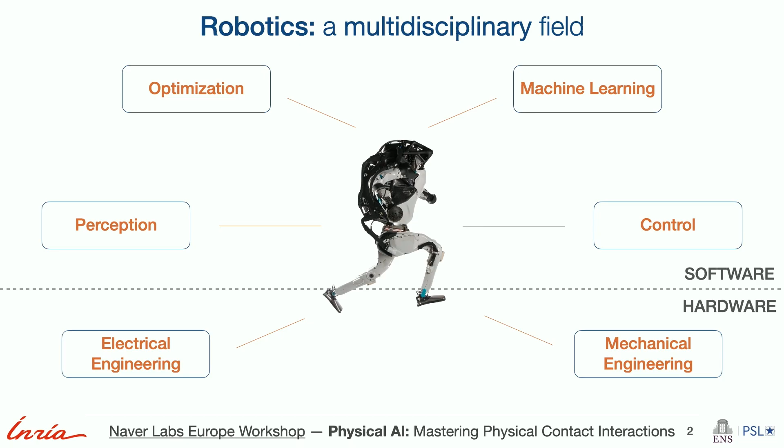You all know, but robotics is a very multidisciplinary field with hardware. I will just talk briefly about hardware, which we never mentioned in this workshop, but I think this is the most important track that we need to focus on now, aligned with the software perspective. For software, we can see perception, optimization, machine learning, and control. And now with foundation models, we are trying to glue everything together. But there is still a gap between software and hardware, and we should move forward.

I would like to cover a bit, from my perspective, where we stand in robotics today. As we mentioned, robots are first and foremost physical systems, so we should first focus on good hardware to make good motion. I think all the people at the cutting edge of research in robotics, like Toyota Research Institute or Boston Dynamics, are there first because they have very good hardware that they master and on which they can rely.

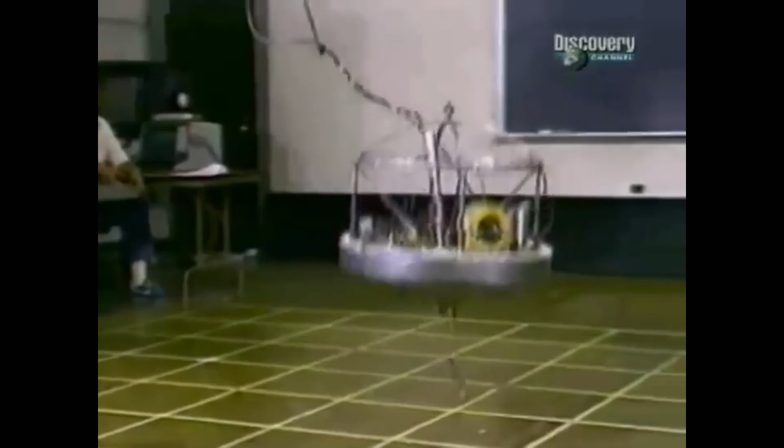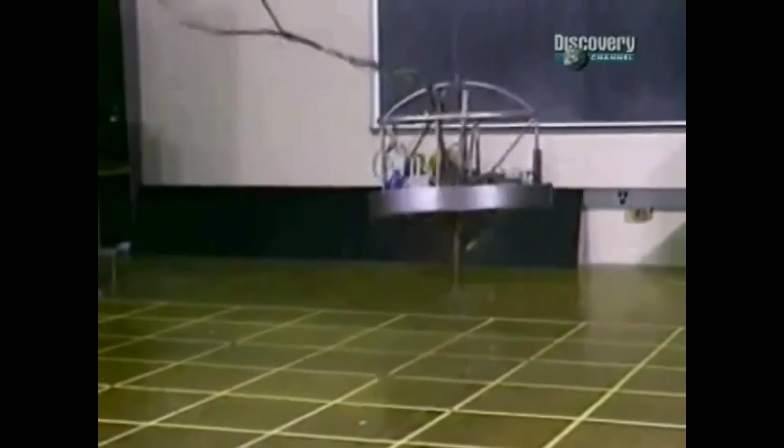Just a short story. This is a story I think most of you already know, but I don't know if you know what is behind this robot. Maybe. Yes, Mark Raibert's robot, exactly. We saw in the 80s at MIT a very nice but simple robot, but very dynamic. When I'm teaching robotics at ENS, I always start the class with this robot, because this is a fundamental thing: behind it there is very little control, a very nice design, and it makes things work and operate with a very limited amount of computational power.

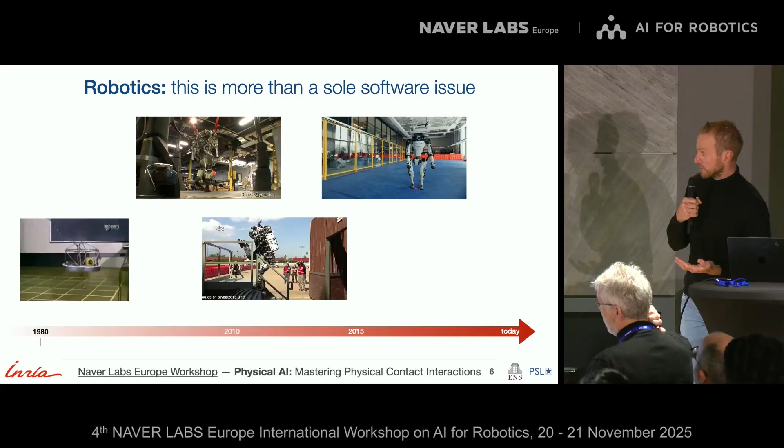This is Mark Raibert's academic journey, and then he started Boston Dynamics. This is in acceleration, but this is the Petman robot. Then we have Atlas number 1 during the DARPA Robotics Challenge. Then we have Atlas number 2, still a hydraulic robot. So Petman, Atlas 1, and Atlas 2 were the hydraulic robots. We have seen very fantastic videos from Boston Dynamics, and with a lot of

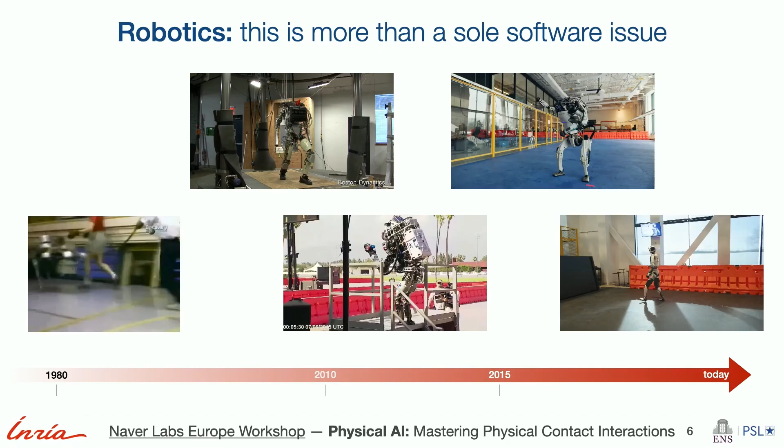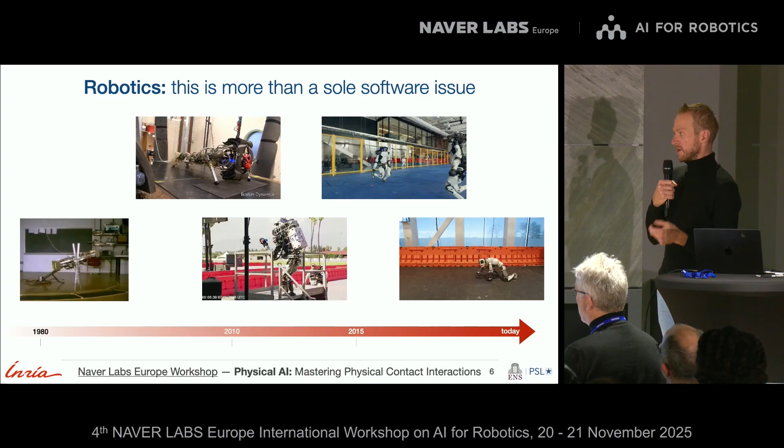gag videos at the end showing what was failing, which is very nice, I think. Many companies today are still not showing what is not working, and I think this is very important to show. I think the work that the LBM teams did is very nice in this avenue. And then we have the latest version of Atlas, number 3, which is a fully electrical robot. What we don't see here is that there was a maturation of the technology to build robots, with what we call quasi-direct drive solutions, in such a way that we reduce the dissipation of power inside the transmission of the robot.

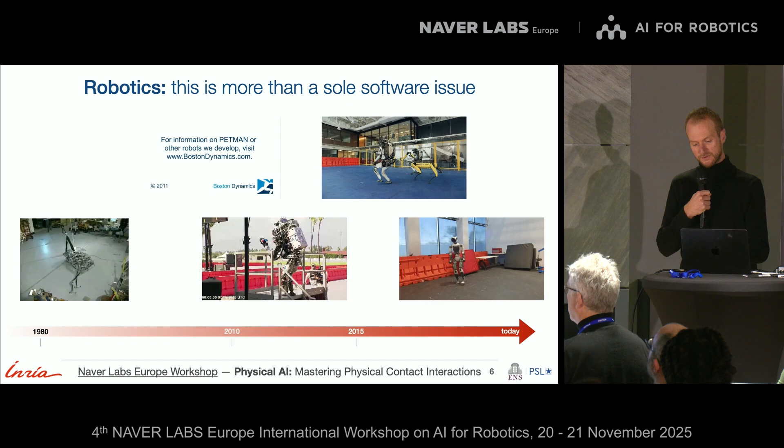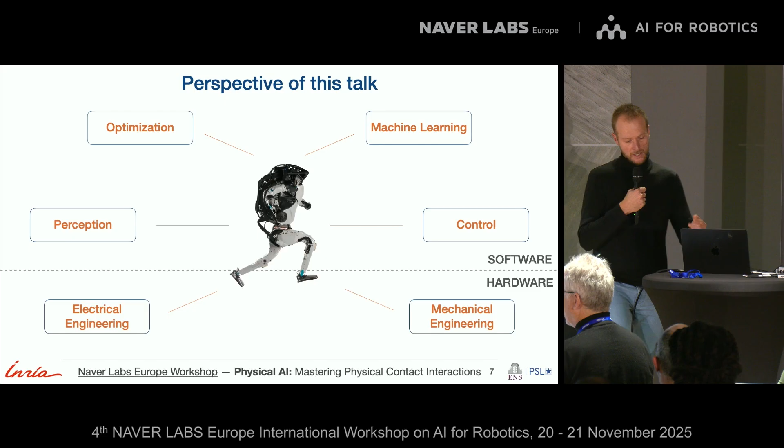Just to mention that, in the history of Boston Dynamics you can see the evolution of robotics, and I think this is important to have in mind if we want to understand what happens, not only from the software perspective, but also from the hardware perspective. We are in the Willow team, so we are not making robots. It's a very dedicated and complex task, but we are mostly working on the software perspective, and I will try to cover a bit of this story today.

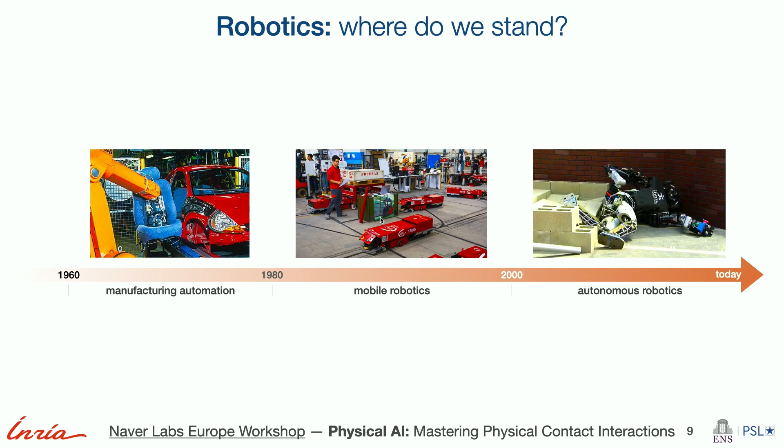Again, where do we stand today from a software perspective? I think we have great success of robotics for manufacturing and mobile robotics, but as soon as we want to put robots outside of laboratories or plants, this is a failure, and we are still lacking autonomous robots. This is a picture from the DARPA Robotics Challenge, which is less valid today because we can see very impressive videos from many companies around the world, but we are still at this level.

For me, the main challenge of physical AI is trying to embrace rich and complex physical interaction in a changing world. And I think this is one of the purposes of why we are here today, to discuss spatial AI and physical AI, and the main problem of understanding contact and trying to master physical contact interaction.

So, the modern way of controlling robots, I will cover briefly what Nicolas presented just before. I'm coming from the same school of spirit, so there is some redundancy. But the idea is that we have a physical space in which the robot evolves, and a sensorial space, which is just a projection of physical space, with a limited amount of information, and we need prior knowledge to rebuild the state of the robot.

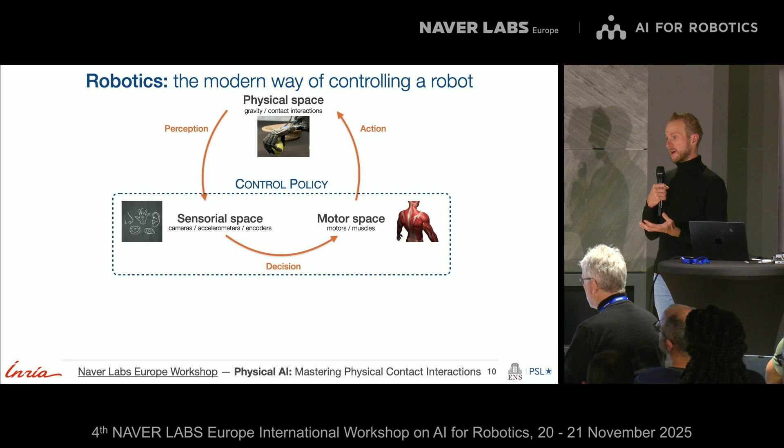And then from this sensorial space, we try to take decisions to move, to control the motors of the robots, and to move forward. The game we play when we do software engineering for robotics is to build a control policy. This control policy is just a mapping between sensorial information and control outputs.

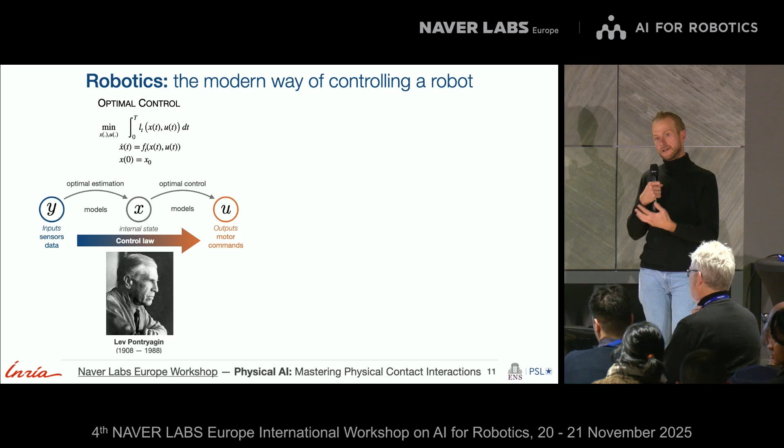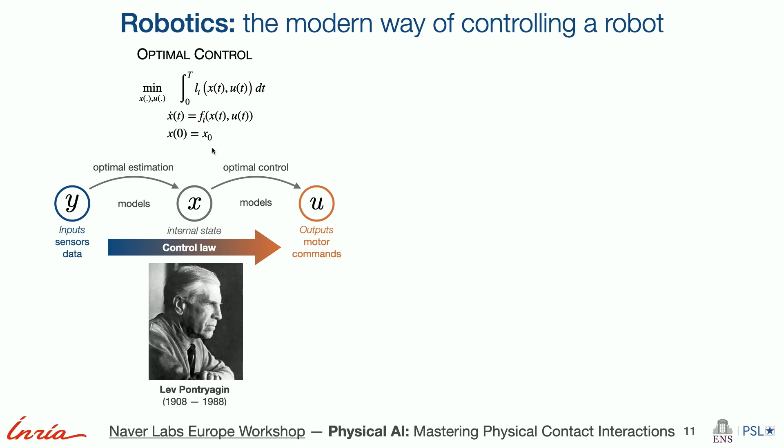Okay, so what we have seen before in the presentation of Nicolas, is that we have on one side optimal control, which is a very old control theory coming from the 50s. I just plotted the figure of Pontryagin, and the idea that in continuous time, we want to minimize a cost function over a given horizon according to system dynamics, which are assumed to be known, and according to some given initial state. Behind that, we have LQR methods, which are a very classic approach when we have linear dynamics, or Kalman filtering if we want to do optimal estimation for a linear system. And this is working, and this is how, for instance, we send rockets into space using this theory.

And this is nice. Nowadays, we are more and more talking about policy learning with RL, which is one of the key components of policy learning. The idea is, instead of working along a single trajectory, you try to learn a mapping which operates over the whole state space. The good thing is that you can put some distribution over your unknowns in such a way that you can be robust. And with deep reinforcement learning, what is also very nice is that you can map very complex sensorial inputs to control outputs in such a way that you are able to learn complex control laws. And this is, of course, Richard Bellman, who is one of the fathers of this theory.

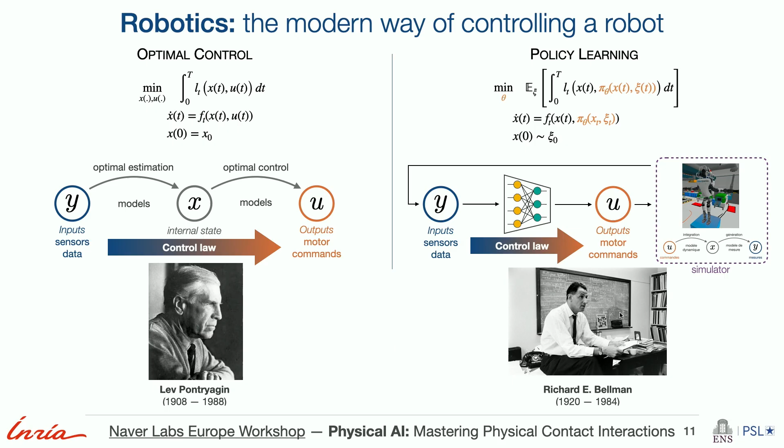So often we mention that RL is model free, but today we massively use data generated from a simulator, which contains a model. So I would say that this is also a model-based solution. And we are not exploiting so much of the information that we can extract from the simulators as privileged knowledge in order to accelerate the learning, for instance, of a control policy. This is one of the topics that we are trying to cover in the Willow team.

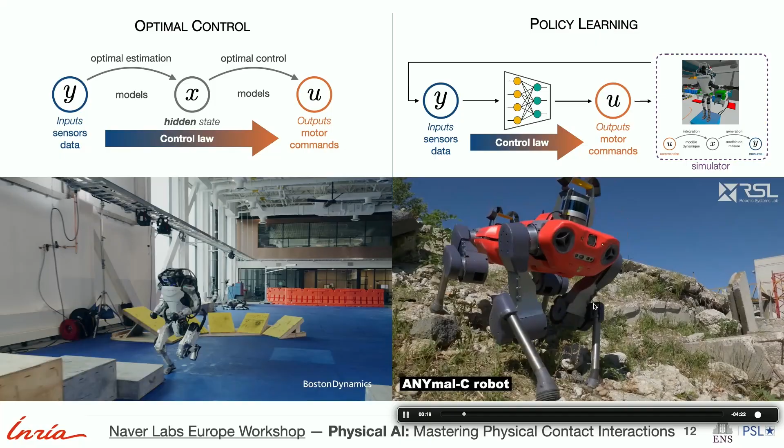So in terms of success stories, I think optimal control remains a very nice paradigm for Boston Dynamics, and they are using the online version, which is MPC, model predictive control, which is working very well. And on the other side, the big success story that showed for the first time RL being deployed on a real system is, of course, the work by the team of Marco Hutter at ETH Zurich, which nicely shows that we can learn a control stabilizer for the robots in such a way that we are able to embrace the world with all the uncertainties that we can get from a rich and unknown environment.

So when I see this problem, what I see is optimization, of course. Either it's what we call trajectory optimization, which is often tractable, but lacks robustness. On the other side, we have policy learning, which is also a kind of optimal control optimization problem, where we often use stochastic gradient descent. It's often more robust against uncertainties, but we are also subject to the curse of dimensionality. So currently, we are building massive clusters for this curse of dimensionality effect. But the question is, can we lower this burden by having better solutions for solving problems?

And then we have, of course, the third approach, which is now emerging. Normally I show the picture of Physical Intelligence, but today I took the one from Toyota Research Institute. I think this is very impressive work that people are doing. I'm not jealous, but I think it's a good time today to see the convergence of model-based and data-driven approaches for robotics and to try to do that.

And I really enjoyed your talk, by the way, Adrien.

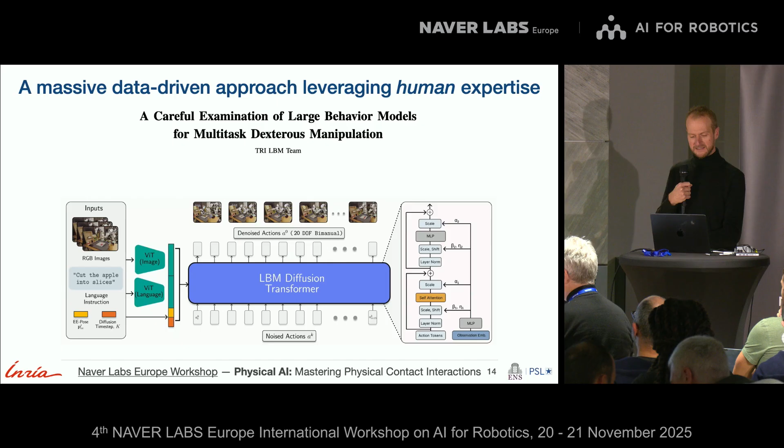And so we discussed a lot with Russ Tedrake more than one year ago at RSS in Delft, and he was saying something which I think is very important. Behind this single author, in fact, it's a team, a big team, and I think this is very impressive. We never succeeded to make it happen in robotics, to have so large a number of people working together to solve a problem. And I would just take the words of Russ Tedrake, who is saying big science.

I think today we are changing a paradigm, going towards big science for robotics, like people did, for instance, for physics. So the question is, which institution in the world can embrace this kind of big science? Currently, in Europe, I don't see an institution which is able to scale like companies like Toyota, which is doing that, but with a large effort of Russ Tedrake and colleagues to convince people to invest in this kind of paradigm, and we can see many other companies.

But the question is, can we do that in academia? I don't think so, but we can try to build the foundations, so mathematical foundations, which can help to reduce at least the computational burden of all these solutions, which are very data hungry and computationally hungry. So I also want to come to the need of data.

So will data solve robotics and automation in general? I will just take a step back from some sentence from Bernard Espiau. Some people, at least grown-up people, know him because he was a big figure in robotics in Grenoble. He was also a big figure in robotics in general in the world because he's the guy behind the task function approach. Maybe some of you know, but it's a very nice concept in control theory for driving robots. And he has also been working a lot on perception for robotics.

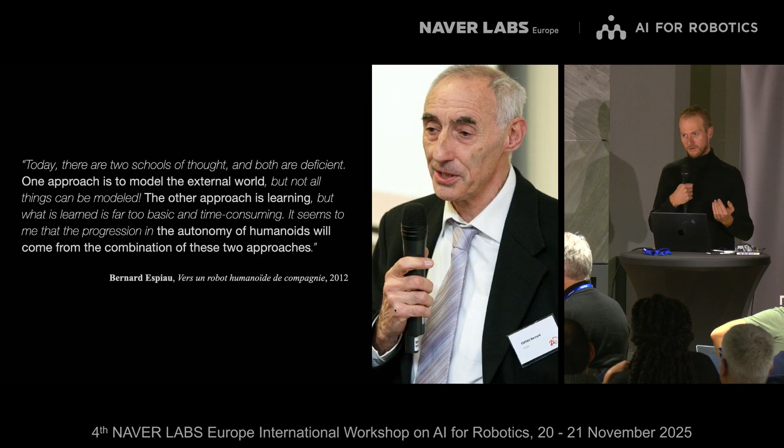So today, what we have seen from the talk of Adrien is that we are at the right time to have the combination of data-driven and maybe model-based to drive the motion of robots, maybe not yet locomotion for humanoid robots, but at least manipulation, which is the next big challenge. And so, yeah, this is the sentence. And again, when I teach robotics at ENS, I use this sentence because I think it's important to recover the thoughts from the past, which are still valid today and that people were already aware of at this time.

Another thing that we need to think about, I think what is nice now, is to discuss big models versus big data. And I think, if you want to have a nice overview from leading researchers in the world, there are nice discussions and outputs from many researchers coming from different perspectives. I think everybody knows all these big names, and there is not a joint consensus, but things are moving, and we can build something around this discussion together.

So the question is, to what extent can a robotics foundation model scale with an increased amount of data? And I think the LBM team is trying also to answer this question with a very nice evaluation program, and I think this is something that we need and have to follow, but with limited resources. So what we can see today is that we have more and more massive datasets available, but maybe not at the scale of Toyota or Physical Intelligence and other robotics companies, for instance.

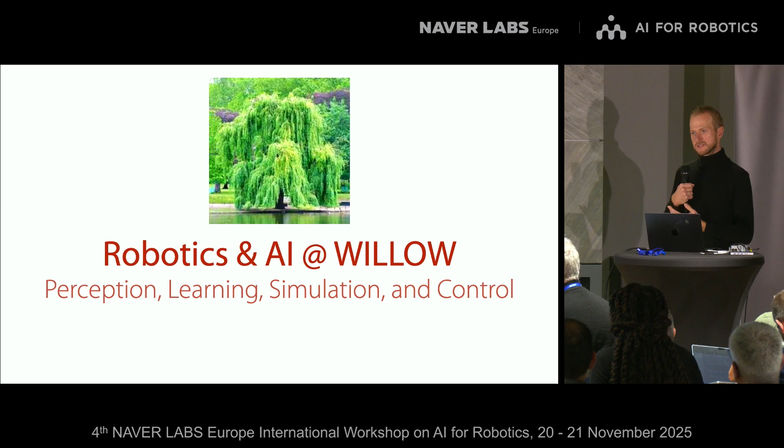So I will briefly show you what we are doing in Willow in terms of robotics and AI. Willow is mostly known because it was a computer vision team at the beginning, and now we have switched part of the team to do robotics and AI, so perception, learning, simulation, and control together, and we are trying to embrace all these topics together.

So this is Willow and Sierra. Maybe the Sierra team is less known by people here, but it's a team from Francis Bach, which is very well known in machine learning and optimization. And we are in a very nice mood at Inria Paris, working together on the same floor and trying to have nice discussions and exchanges about the things we do.

So the team of Francis is very theoretical, but very inspiring for us to try to put much more theory inside what we are doing in robotics. So the team is growing. Now we are almost 50. So there is Cordelia today and other people.

We have many postdocs and also many engineers, which is not classic for an academic team, at least in France, because we build a lot of software. And I think, like Pinocchio, and I will try to cover it, it's important for us to build software on which we can trust, on which we can do research, and that we can also deliver to the rest of the community for building larger applications.

So if we need to summarize, the modern control paradigm today is data, optimization, and compute. Data, if we take the presentation from Adrien, is a lot of supervised learning from human data. Optimization is often zero-order optimization, which is slow to converge. And we need a larger amount of compute. We never mentioned these numbers, but we need dedicated infrastructure for that. So huge, slow, and massive.

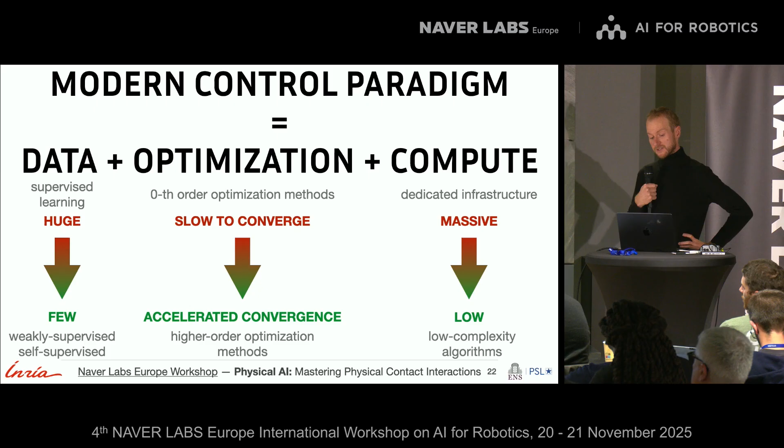And so maybe one program that I want to pursue over the next few years is to work mostly in a much more weakly supervised manner for reducing the amount of data, trying to accelerate convergence of optimization solvers, and also trying to work around low complexity algorithms. I will show you in this talk how we have been able to reduce the computational burden of simulation drastically. So the key ingredients: reliable data, good optimization, and reasonable compute. This is the motto of the team.

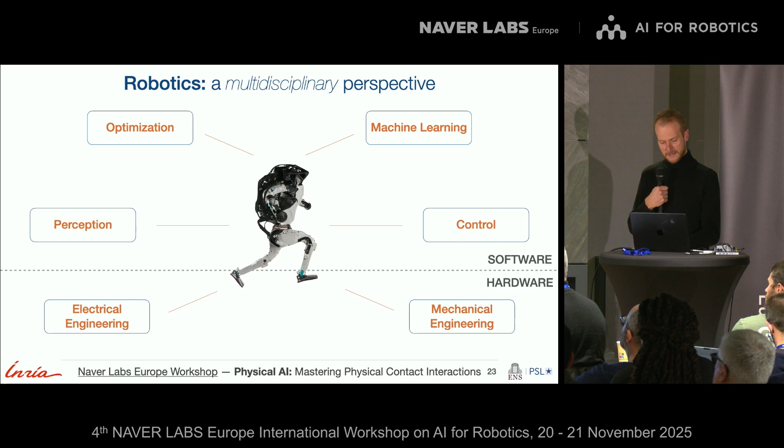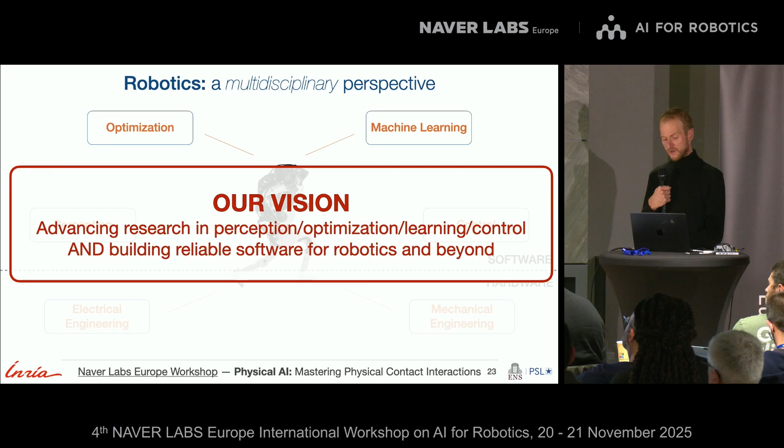In the team, we are trying to cover perception, optimization, machine learning, and control together. Our vision is to advance these research topics together with, as I mentioned, building reliable software for robotics and beyond, because what we can do in robotics can also have impact in other domains. But for me, something important if we want to connect model-based and data-based approaches is gradient information, for instance in architectures and so on. So it's important to work around this notion of gradients, to connect model-based, which is one way to bring first principles, inductive bias, and interpretability guarantees, to data-based, which is the way to go if we want to deploy things in the real world.

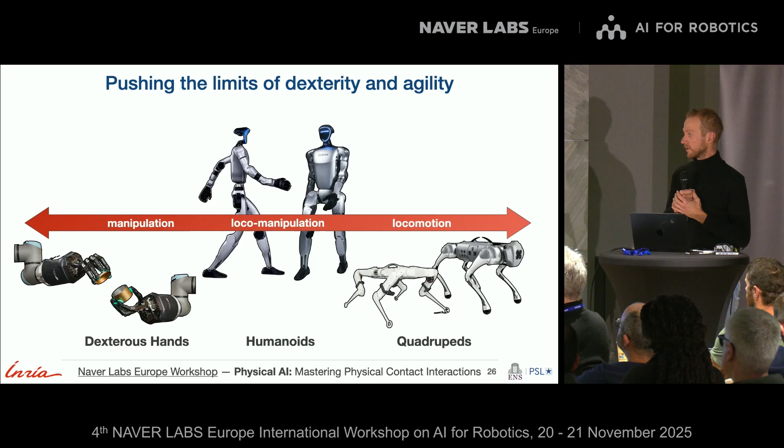Another paradigm, a research agenda which is true for academia, but maybe less for companies, is to transform black boxes into gray and maybe white boxes, I don't know. But at least trying to see something behind the notion of architecture. And in the team, we have also started to work with robots. We have a large span of robots, and we want to build a single software pipeline in such a way that we can work on manipulation, loco-manipulation, and locomotion in general of a generic platform.

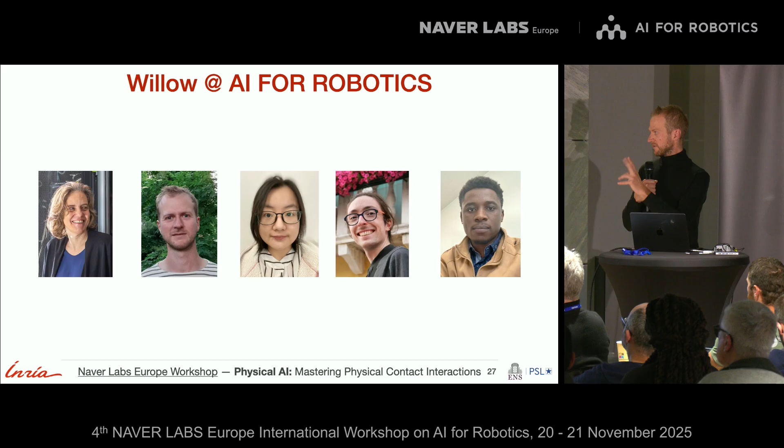Okay, so today several of the team were here. Cordelia presented, she's here, and we have posters. One poster was about Sobolev diffusion policy, very inspired by the work of the Toyota and Russ Tedrake team, about how we can accelerate diffusion policy learning using gradients, which is interesting, I think, to lower the need for computational power.

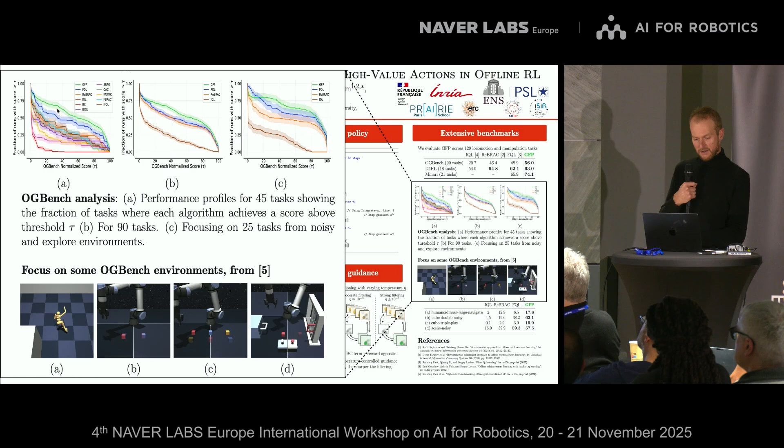And another work, also promising. We have been discussing with Christian about off-policy. This is work from the students of the team, to learn both actor and critic using flow policy and distillation of flow policy into the actor, in such a way that we are able to extract the most sensitive information from the dataset in the context of a poor dataset. These are some benchmarks that they did, and in green is our method, which currently achieves state-of-the-art performance for offline RL using a combination of energy-based and flow matching-based solutions.

So in the team, what we also see is that open source can be used as a catalyst. I will try to cover the research agenda that we have and results for the software that we developed.

And the paradigm that we are trying to follow, unlike others, I think it's more with less, trying to go towards simpler, nimbler, faster, stronger solutions with less code, compute, and bugs in general. So I started to develop that when I was in Toulouse, in the Gepetto team, called Pinocchio. So Pinocchio is implementing mostly rigid body dynamics algorithms to control robots in general and any kind of rigid robots.

So today it is very used by many companies around the world and in France. So Wandercraft, which is building exoskeletons, Enchanted Tools. But if you have a Franka Emika now, they provide Pinocchio inside them and so on. So many companies are now relying on Pinocchio. So we are very proud of these achievements.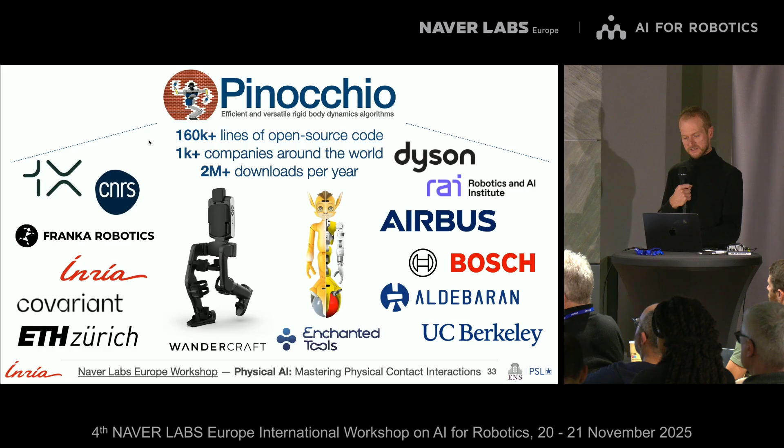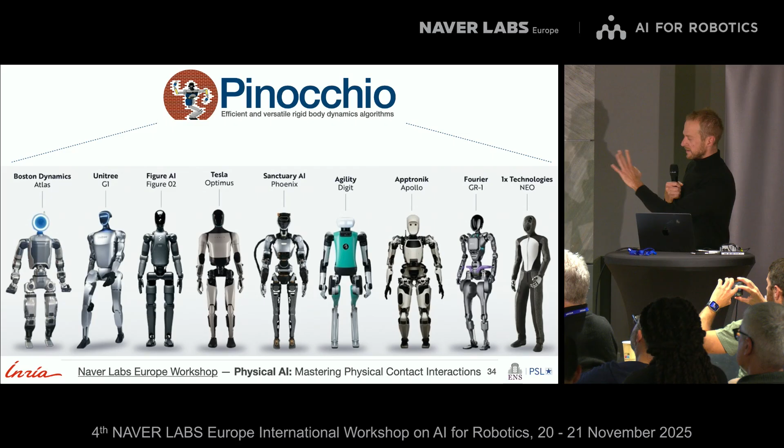Many humanoid robots today are also driven by Pinocchio, which is also a nice success, I think, from academia, showing that what we can produce as software can be used by companies. So not all of them, of course, but some of them. So we don't know for all of them, I would say, but at least Unitree we know.

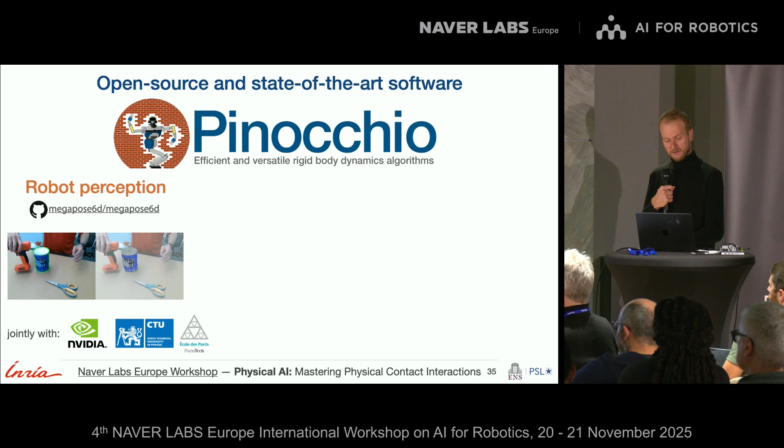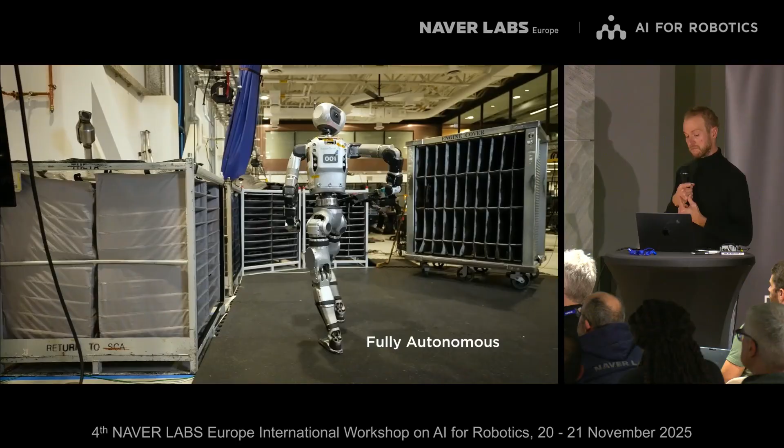So we have also been working on the perception aspect. So this was the work of Yann Labbé in the team, with a joint collaboration with Dieter Fox's team at NVIDIA and Josef Sivic. This is a kind of application of object pose estimation, 6D pose estimation, like this one, which is a nice illustration of where you can try to use 6D pose estimation in a real-world application. So this is a very nice work by Boston Dynamics.

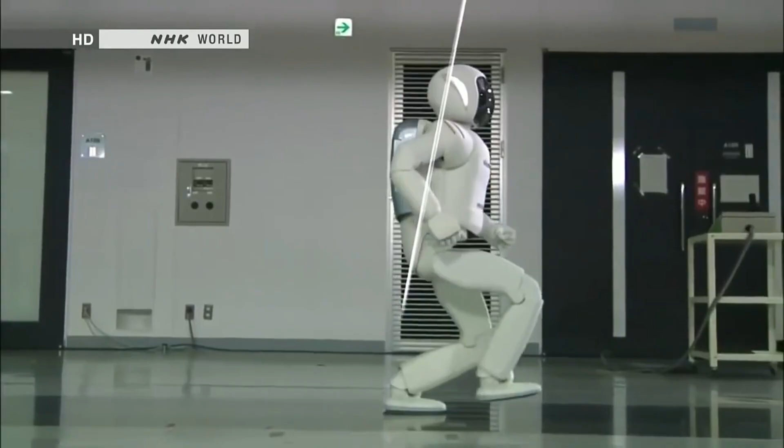In the team, we also work a lot on optimization. So for us, optimization is key. And for that, if you look at this motion, this is optimization based. There is no RL. This was done more than 10 years ago by Honda, which is a very nice achievement of locomotion on a biped robot, very smooth motion. So behind that, you have optimization. So optimization remains ubiquitous in robotics.

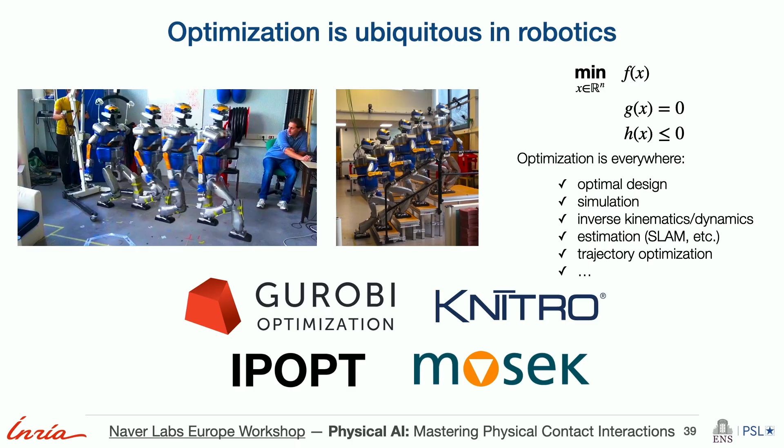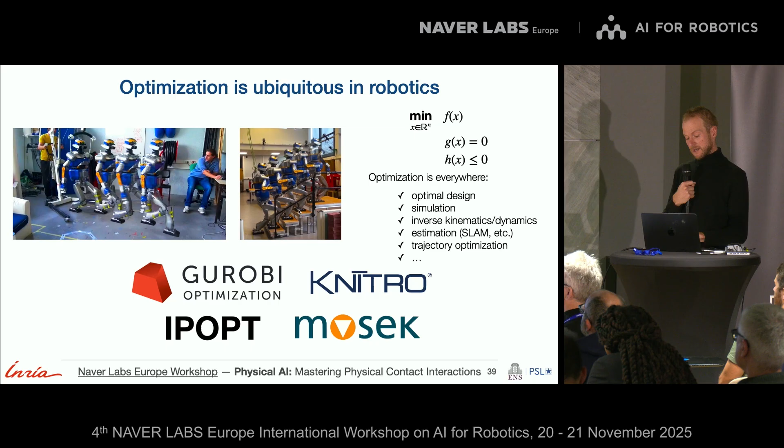And often, what you can see is that there are a lot of optimizers that you can download on the internet that you can try to use on robots, but they won't work because they are not reliable enough. So they cannot find a solution for a problem, and it can be a nightmare if you want to do online control. And also, they might be too slow to be deployed on a real robot. So for that, we are trying to build dedicated solvers for robotics. For instance, we have developed over the past 3 years ProxSuite, which is a nice library for solving QPs, quadratic programming problems, which are ubiquitous in robotics. And now we are trying to extend it towards non-smooth and non-convex optimization problems.

So this is a very long agenda in terms of optimization, but we will see later some results of this aspect for generating locomotion. What is nice is that even if you are a roboticist, we can also do some benchmarks against problems from the literature, and we can beat commercial solvers in terms of timing, efficiency, and so on by writing our own solver, and this is also a nice achievement. So what we do in general is that we devise new optimization schemes which are new in terms of theory, and solvers that promote scalability, stability, efficiency, and differentiability. One key thing is that we are also trying to do differentiable optimization if we want to put an optimization layer inside deep learning, for instance.

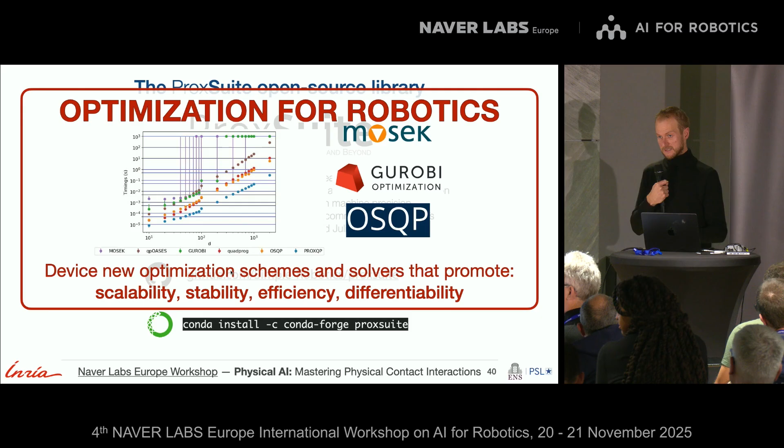And what you want when you do differentiable optimization is that your solver always sends you a solution, even if there is no solution. You don't want, when you do a forward pass over your neural architecture, to have a NaN somewhere or no solution. And so for that, we develop solvers which are able to always send a solution, which is the closest one if the problem is infeasible. And this is a very nice feature for differentiability.

Another topic on which we work a lot, and on which we have been pushing a lot of effort, is simulation. So I will cover that, and I really enjoyed also the talk of Adrien. Again, Adrien, just because he mentioned that simulation remains key, and I think it's encouraging us to pursue all the work around simulation. I know that the LBM team is also working a lot around Drake, and Drake is also pursuing a lot of effort on rich contact scenarios and simulation. And I think what they are doing is very nice.

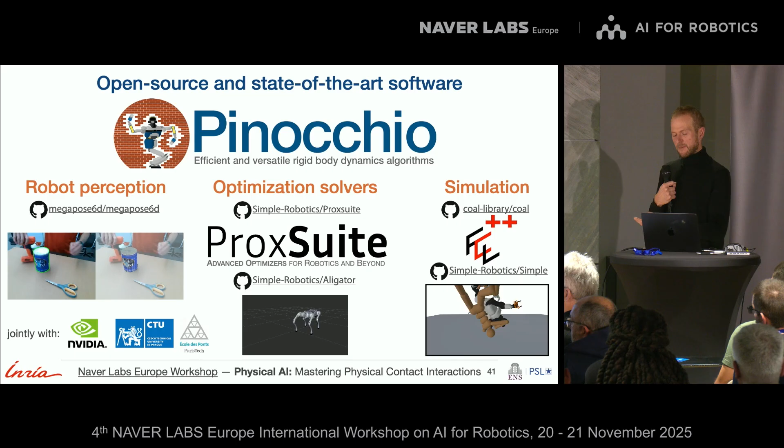And just to mention that there are only few people, in fact, remaining who are still working on this topic, which remains central to robotics. And I encourage the young generation, if they want, to work on this topic, because I think it remains fundamental. Even if today we are speaking about world models, which is also another line of simulation in some sense, we still need, at some point, model-based simulation if we want to understand things.

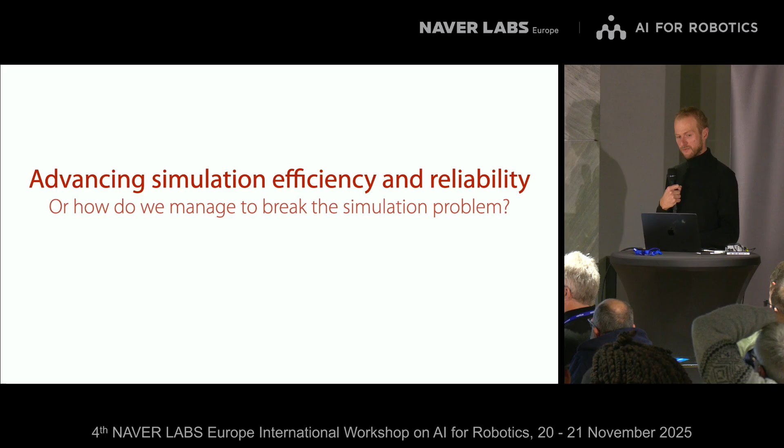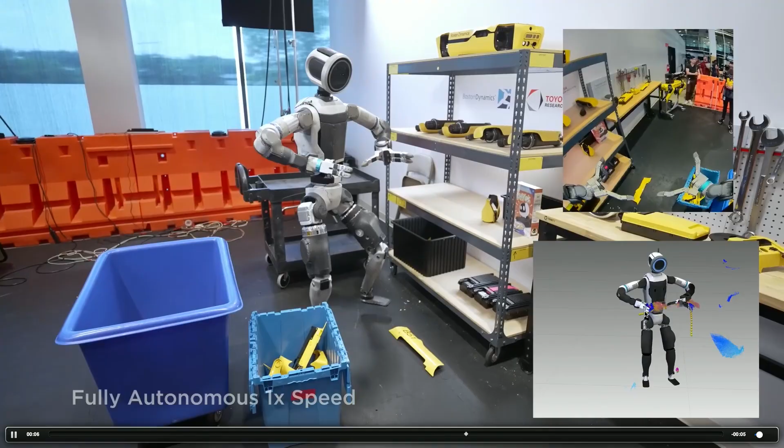So what we want to do is advance simulation efficiency and reliability, and how do we manage to break the simulation problem. What I mean by breaking the simulation problem is to lower the complexity of simulation in general. As you have seen, simulation is ubiquitous in robotics. I think this demonstration on the bottom right is simulation, still relying on simulation to certify the motion and to check that there is no collision, which is a nice last-line feature.

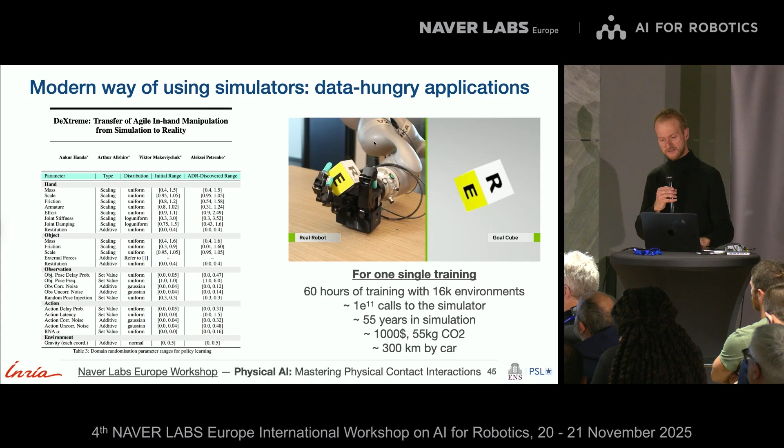And this is another example of using simulators. Often it's a data-hungry application when you do RL. Some timings that you can find in the DexTreme paper by NVIDIA: for each training it's 60 hours of training with 16k environments, which is huge. So 10^11 calls to the simulator, which is huge. 55 years of simulation, which is huge. $1,000 for doing one single training, which is a bit huge, and which corresponds to some carbon footprint in terms of carbon emission with a car, and which has an impact.

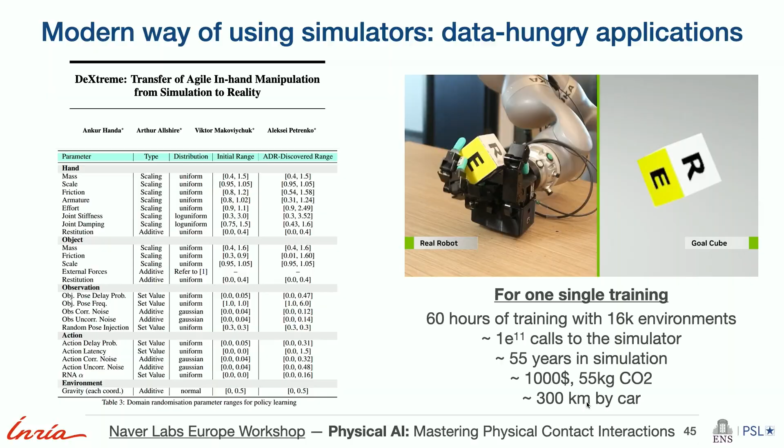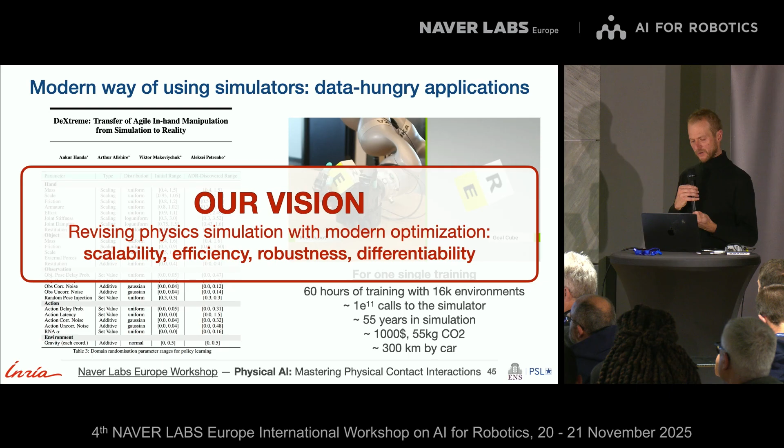So all the time that you call a cluster to do a computation, it has an impact somewhere, and this is not free. And I think at some point we will have to pay the price of this kind of thing. So the vision that we have is trying to drastically lower the computational burden of simulation. And again, with the same wording: scalability, efficiency, robustness, and differentiability.

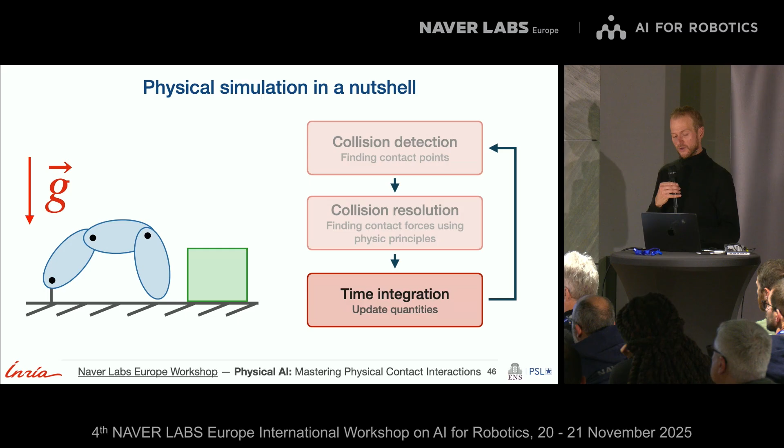So simulation is mostly three main stages. The first one is collision detection. You want to find the contact points between the objects in your environment. Then you have collision resolution, which is how you compute the contact forces, inherent to the physics of the world. And then time integration, because you numerically discretize an ordinary differential equation to simulate it, which is hard in general. For collision detection, if you have n objects in your scene, you need to do n² queries to check collision between a pair of geometries. So you have broad phase and narrow phase to try to lower this burden.

And the main algorithm known from the literature is the GJK algorithm. I don't know if you know it: Gilbert, Johnson, Keerthi, which was developed in the 80s to solve collision problems in a very small number of microseconds in general, even for very large meshes. The idea of collision detection is that you want to find the contact point between geometries, what we call the witness points. And often we assume that the geometries are convex. And so instead of working in the ambient space of the geometries, you work with the Minkowski difference, which is a way to solve what we call a minimum norm point problem, which is often easier to solve than the original problem.

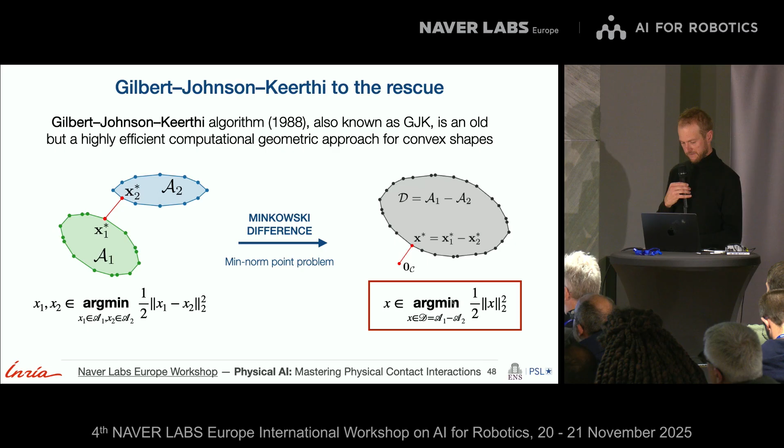So this work was developed in the 80s, as mentioned, by these three people. And for 40 years, nobody has tried, or at least succeeded, to reduce the potential burden of this algorithm. Collision detection at this time was seen as a computational geometry problem, so without thinking of optimization, because communities were not discussing so much together. But you can see that the GJK algorithm is a gradient descent mechanism, what we call the Frank-Wolfe algorithm. And you can use accelerated gradient descent to reduce the number of iterations needed to solve this optimization problem. This works pretty well because we can divide by 2 the number of iterations needed to converge. This has a drastic impact because you divide your timings by 2, and as you have n² queries to your local collision checker, you have an impact. This is something that we have put in the paper on the left.

We have forked, like Toyota did, FCL, the flexible fast collision detection library by Dinesh Manocha, and we have pursued the work of developing it. And now we are maintaining a fork of it. What we have been able to do is recast collision detection as a Frank-Wolfe optimization procedure to accelerate it.

And just to mention that if you have implemented GJK, which is in any video games, for instance, where GJK is running, you just need to change 2 lines of code to get the benefits. So it means that you don't need to rewrite a new software stack. You just need to change 2 lines of code. And this is very magic. And this has been done only 40 years after the creation of the algorithm. But I think there are many algorithms in the literature that we can still accelerate and make huge progress and huge impact for the community.

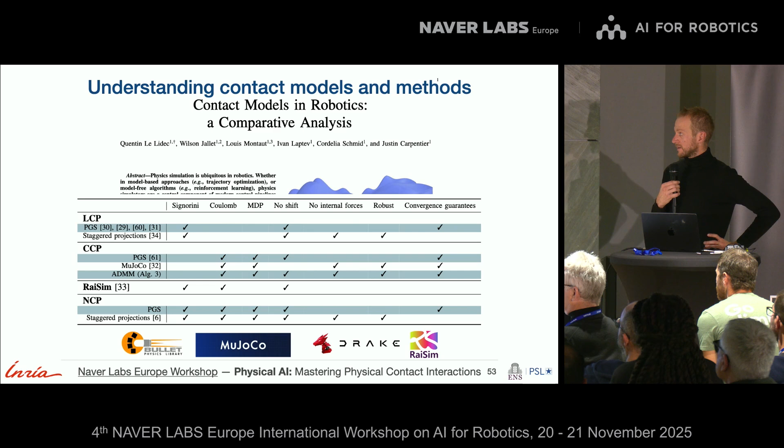So, collision resolution. The idea is that we need to understand how simulators work. And for that, with Louis and Quentin, who were our PhD students, we have been working a lot on trying to understand contact models in robotics. Because in fact, there is no ideal simulator. All the simulators are cheating in some way, and this is normal or expected at some point because the problem is very hard. So what we did is that we have tried to cover all the main simulators like Bullet, MuJoCo, Drake, RaiSim, and so on, and try to see the limitations of each of them and have a fair analysis of what happens in terms of physical inaccuracy and inexactness that can be exploited by your RL algorithm if you do deep RL, for instance, because you will exploit them for sure.

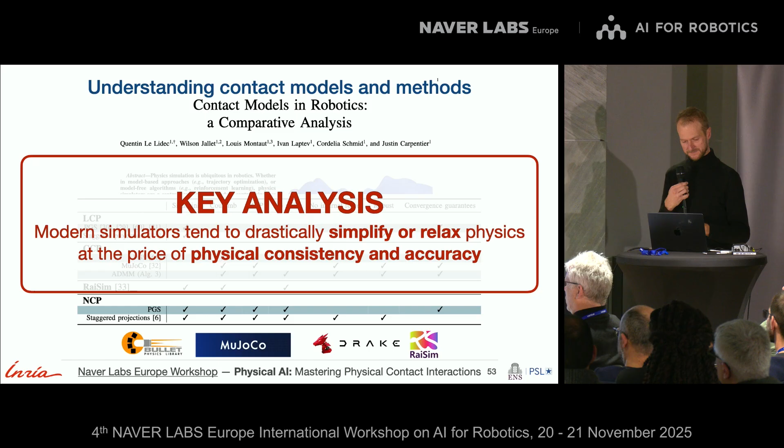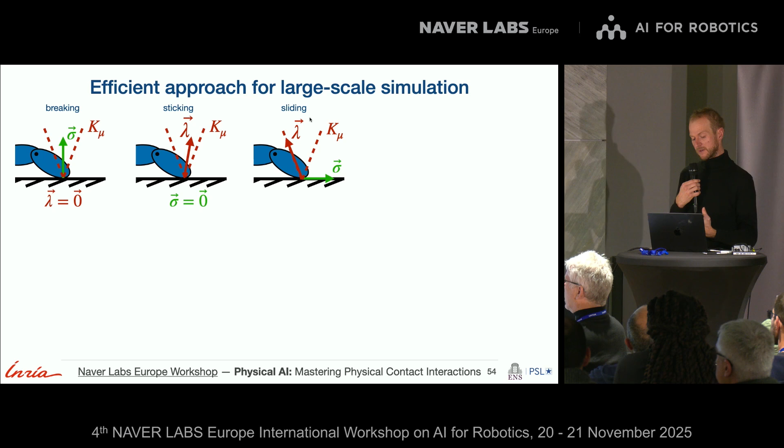So what we observe is that modern simulators tend to drastically simplify or relax physics at the price of physical consistency and accuracy. So what is contact physics? Physics of contacts is mostly you have a contact point between 2 geometries, and what you can define is that you have 3 main modes: breaking, sticking, and sliding. Either you are trying to remove your tip from the table, and so you have a positive velocity and zero forces. Either you are sticking, so it means that you have a zero velocity at the contact point, and the contact forces lie in the so-called Coulomb friction cone. And third, you have a sliding mode, which corresponds to the fact that when you start to saturate your friction cone, you start to slide on the surface. And this is another phenomenon which is very important to capture.

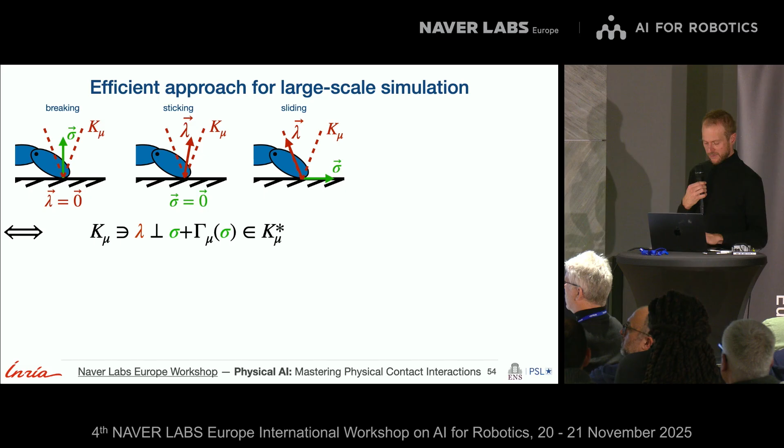And this corresponds to what we call a nonlinear complementarity problem, which is hard to solve in general. I won't dive into the math, but what we have shown and demonstrated is that you can recast it as an interleaved optimization problem that you can solve efficiently with what we call ADMM-based approaches. So this is something that we have developed. We presented it last year at RSS. We are still making progress on that, and soon you will see better solvers. I cannot mention everything, but just to say that.

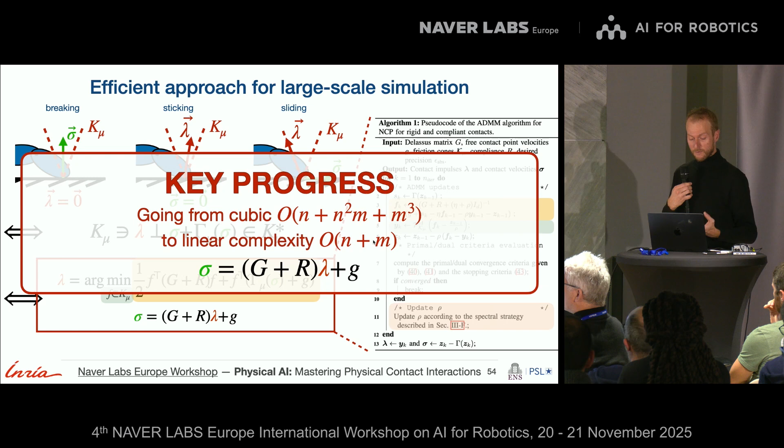Okay, sorry. So just to say that all the things that we mentioned have recently been reproduced by Disney Research.

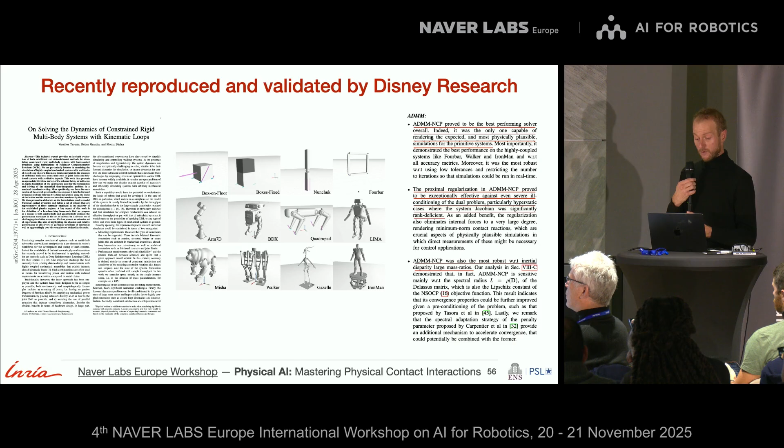They did something very aligned with the comparative analysis that we did, but even much more involved, I would say. And they have some nice conclusions about our work, so I won't cover it directly, but they assess that it has good behavior for the simulation of their complex system. They're trying to build a really complex robot, much more complex than what Boston Dynamics is doing in terms of the number of links and degrees of freedom.

So we double the number of links here, we double the number of degrees of freedom that we need to control. And the idea for them is to deploy this robot inside their main attraction park, at least in Paris, in Disney Paris. So I think this is, for us, a nice recognition of what we did.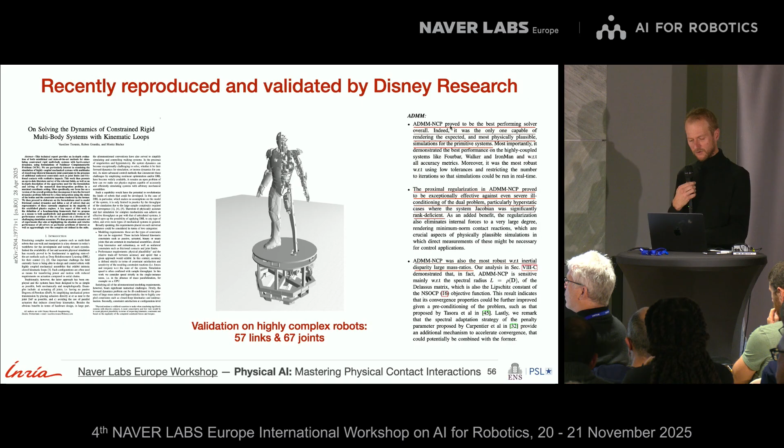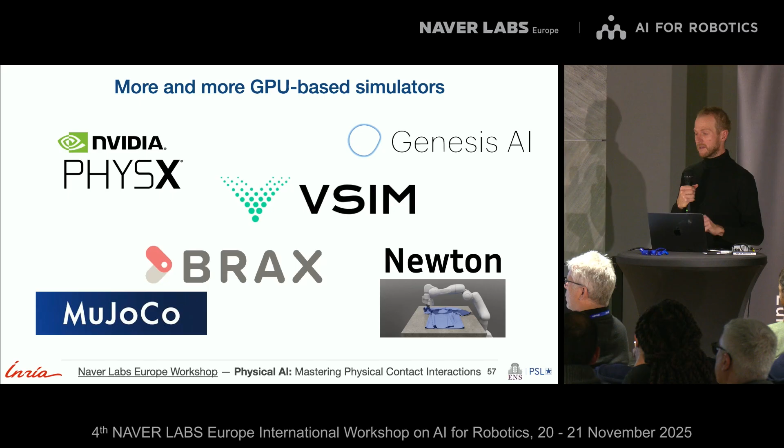There is also nowadays a trend to go more and more toward GPU-based simulation, which is understandable because we want to have all the computational flow on GPUs. Yet, I don't know if we need to put all our efforts on GPUs, and maybe we can still put our efforts on CPUs, because I prefer to work on my local computer without the need for big GPUs. The good thing with a CPU-based simulator is that we can be as fast as possible, but we cannot do massive computations. GPU is very good for massive computation, but you cannot be as fast as CPU-based.

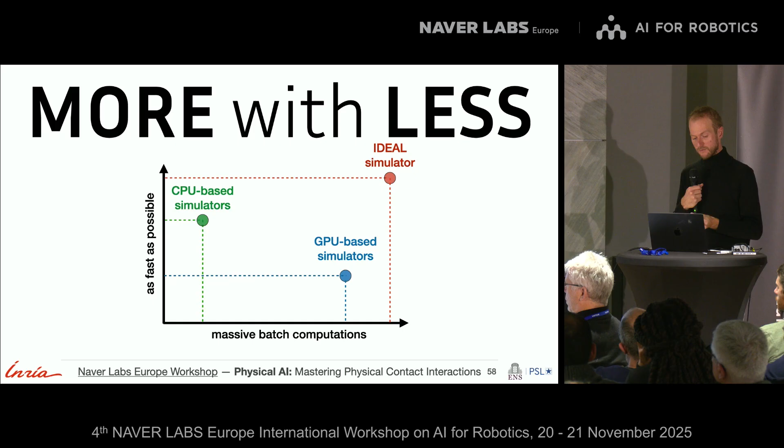The ideal simulator would be to get there, so more with less. So in the team, we are now also putting efforts, which are also engineering efforts, toward this ideal simulator, saying that we want to do massive computations if we want, but maybe we don't need to if we use gradients, and to be also as fast as possible.

So the last thing that I want to show you is what happens if we want to invert the physics. Physics is a complex, non-smooth problem. But what we did recently is that we developed contact-implicit inverse dynamics solvers. Inverse dynamics has been known for a while. Oussama Khatib at Stanford was one of the precursors of that. But at that time, you had to assume the contact mode of each limb in contact. So if you are sticking, you tell the solver that you are sticking.

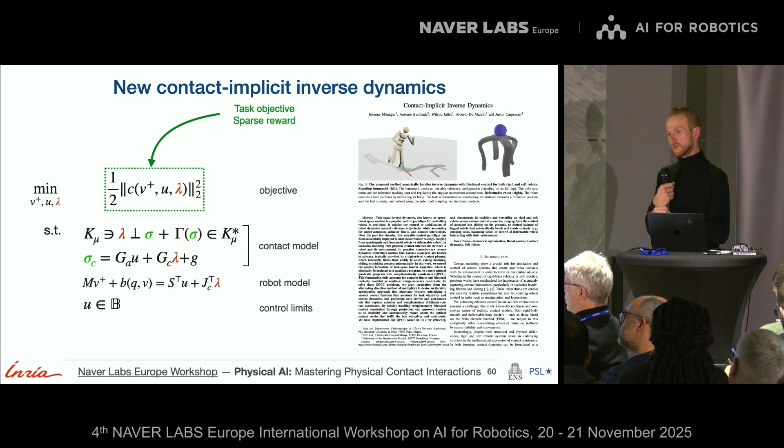Here, what we did is that we put the simulator directly as a constraint, and we developed a dedicated non-smooth, non-convex solver for that, which is able to solve this problem in very few milliseconds, and accurately. And you can define a very sparse objective. Sparse in the sense that if you want to ask your robot to just jump, you just mention that you want to jump to a given altitude. This is the very sparse information that you provide to the solver.

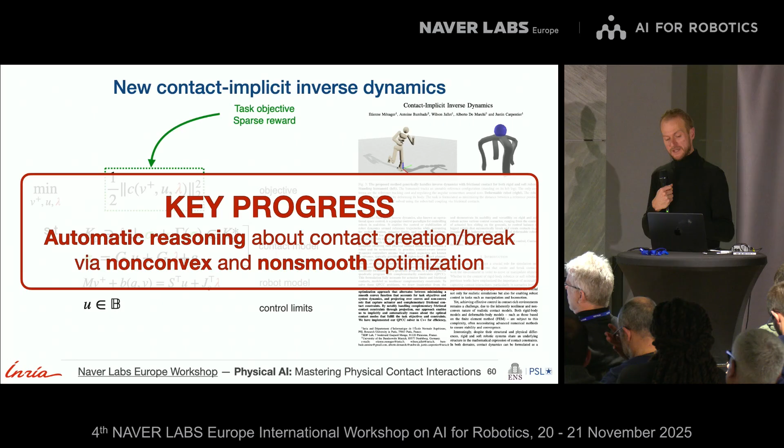And what we have been able to do is to have an automatic way of reasoning about contact creation and breaking via non-convex and non-smooth optimization. And this is some result that we can show. So this is real time, no learning. This is the kind of motion for which you often need trajectory optimization. Here, there is no preview of the future. It's just what we call instantaneous control.

So the robot just foresees one step in advance, and it's able to find a nice strategy, which is very myopic in terms of preview, but which is very similar to what Nicolas presented just before. But before, it was using RL, massive computation and so on. This is milliseconds on your laptop, single thread. And just by inverting the physics, but the key thing here is really to solve the optimization problem properly.

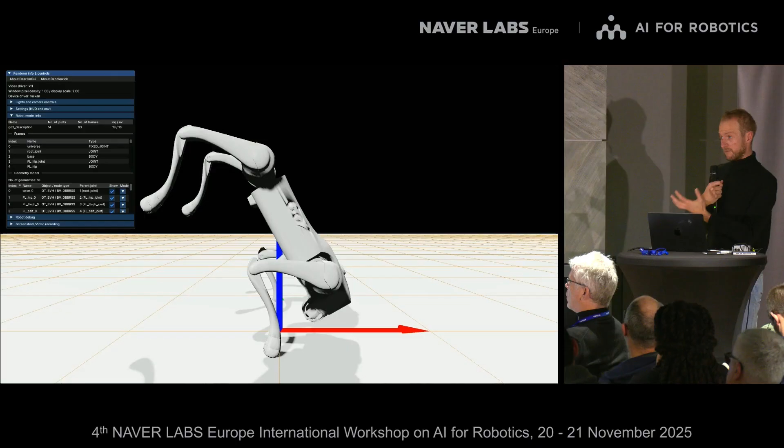Often, what we do in robotics is we try to relax the problem to make it solvable by dedicated solvers. But in fact, it's not a good thing to relax the problem. We can exploit the structure of the problem and try to devise a dedicated optimization scheme which works properly with the problem. And this is what we are trying to do in the team. And we are making progress towards releasing all these achievements inside new software.

Okay, so maybe I don't have so much time. Do I have exactly 5 minutes, or maybe 1 or 2 minutes if you could complete?

Okay, so something that we want to do also is to have differentiable simulators. Nicolas mentioned that currently there is no good differentiable simulator, and by doing differentiable simulation, we can connect data to model and model to data, which is a good thing. I won't cover all the things, but as we mentioned, contact dynamics is non-smooth, which makes the problem very difficult to differentiate.

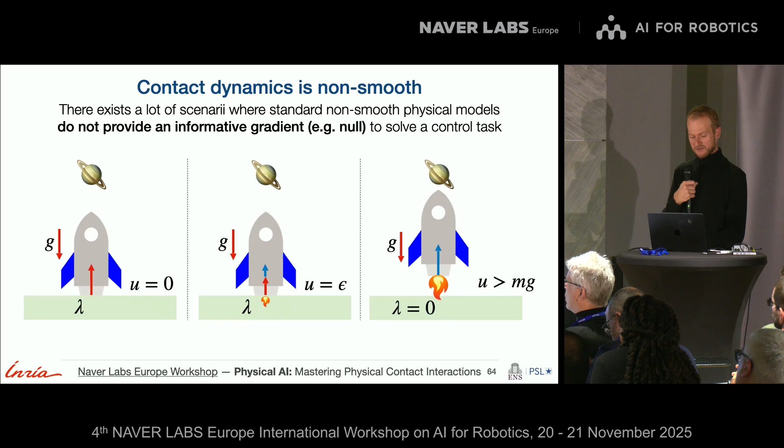For instance, you have here a rocket, you don't have any control input, so you don't move. If you put a small control thrust, you won't move either, and you will start to move only when you start to compensate for gravity. This makes the problem totally non-differentiable, which is hard to exploit inside classic optimization schemes, which assume smooth gradients. So classic optimization problem solvers will fail.

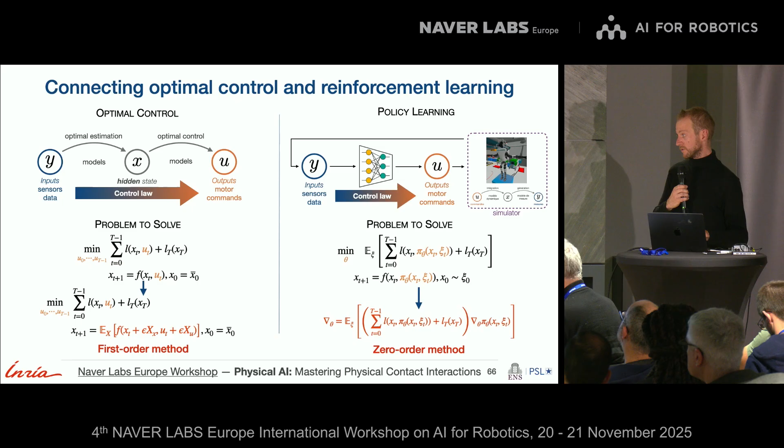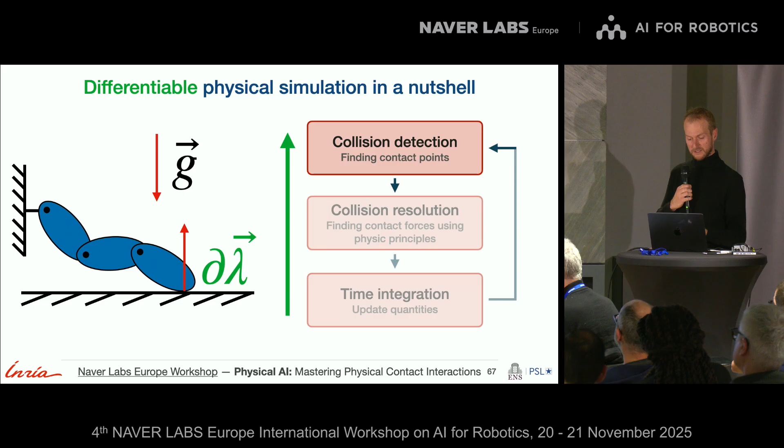What we have shown is that optimal control and policy learning can be connected through this notion of randomized smoothing. This is a parallel result from the team of Russ Tedrake at MIT with Terry Suh. Policy learning, on the right side, uses zero-order methods, which can be slow to converge in general. On the left side, we can try to do first-order methods. I won't cover this part because I don't have enough time, but we have developed a nice framework to extract subgradient information out of the differentiable simulation. Subgradients, because we have a non-smooth problem.

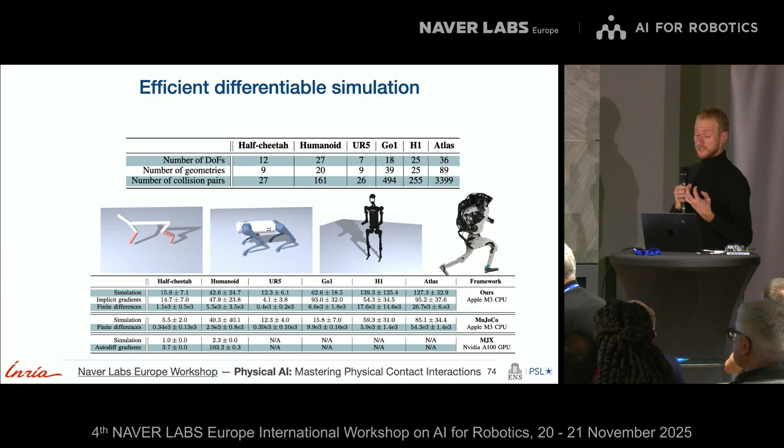I will just show you timings to convince you. Often, if you look at the MuJoCo GitHub issues, they will say that if you want to compute derivatives, just use finite differences. If you do that for a non-smooth problem, it will be a drama, because you cannot differentiate properly that way. So to properly capture the derivative, this is what we have done. I will show you for the Atlas robot. Doing the forward simulation takes 100 microseconds for one step, but computing the gradient costs even less than the forward pass of simulation. So for about double the price of the forward simulation, you can get gradient information, and you can plug it, for instance, into policy learning, trajectory optimization, and so on.

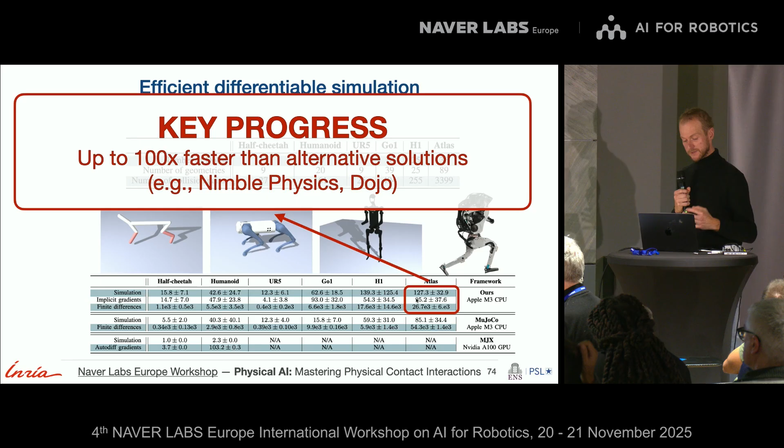And this is a nice result. For that, we have been able to properly exploit all the features of our robots, design and mechanism. This is joint work with Quentin, Louis, and Yann at Inria.

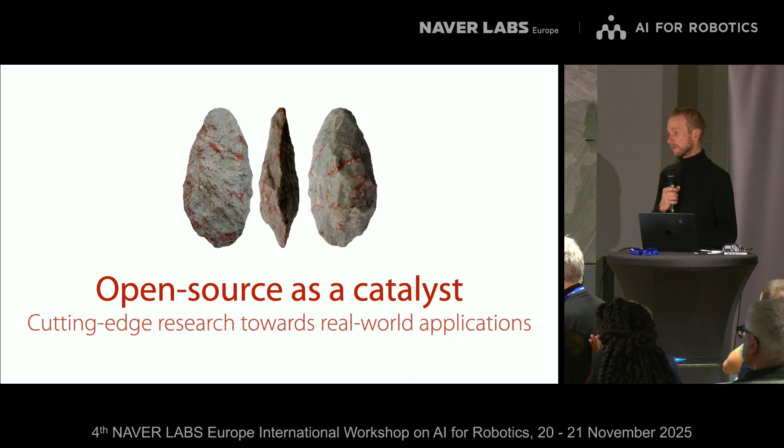Again, open source is important for us, and it should be a catalyst for transforming research and transferring research from academia to industry. We have this set of methods that we have developed over the past few years, and we are now trying to launch an initiative called Maestro, an open source consortium for robotics to catalyze research and deployment in general. We can think of scikit-learn: Inria is known for scikit-learn, which was built around a consortium. We want to do the same kind of initiative around robotics, with a set of methods, solvers, and software modules for real-world applications.

So now I'm done. The main lesson: good hardware is essential, good software is essential too, and I think we need to work on both sides. Truly autonomous robots don't exist yet, and simulation remains a cornerstone in robotics, so we need to pursue effort on this part, while we also work on the other aspect of simulation, which is world models.